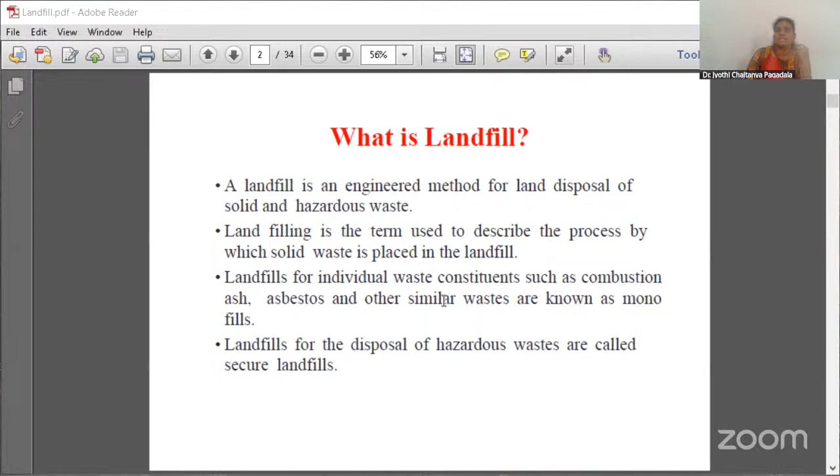Usually, the term landfill is an engineered method for land disposal of solid and hazardous waste, describing the process by which solid waste is placed in the landfill. Here you can see the presence of landfills.

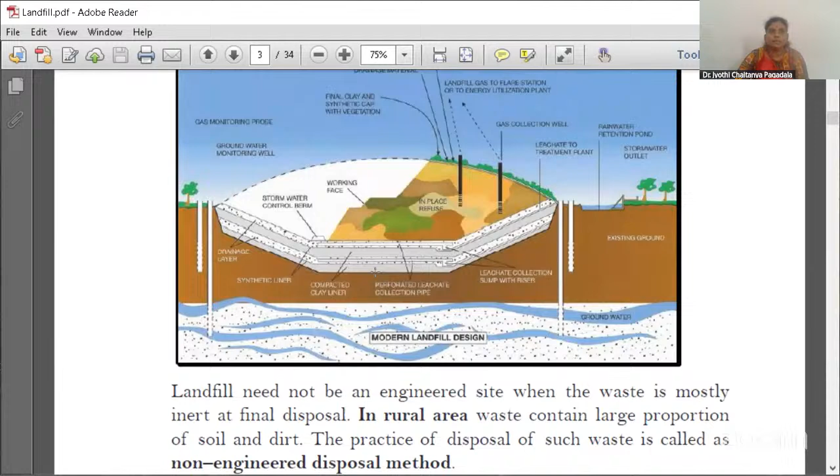Here it is a modern landfill design, and this design explains that a landfill need not be an engineered site when the waste is mostly inert at final disposal. In rural areas, waste contains a large proportion of soil and dirt.

The practice of disposal of such waste is called a non-engineered disposal method. Here we can consider this a modern landfill. In the upper layer, we have the presence of clay and synthetic cap with vegetation, granular drainage material, moisture barrier layer, and landfill gas going to a flare station or to energy utilization plants.

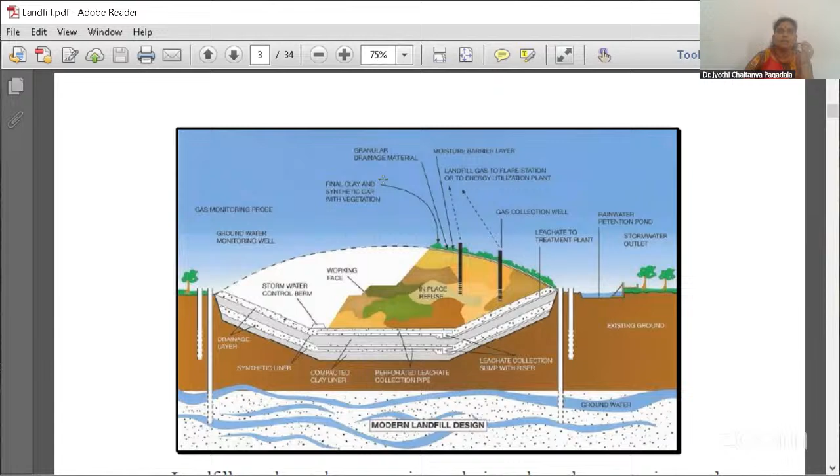What is the basic principle of this landfilling purpose? The purpose of landfilling is to bury or alter the chemical composition of the waste so that it does not pose any threat to the environment or public health.

Landfills are usually made up of cells in which a discrete volume of waste is kept isolated from adjacent waste cells by a suitable barrier. A cell is used to describe the volume of material placed in a landfill during an operating period.

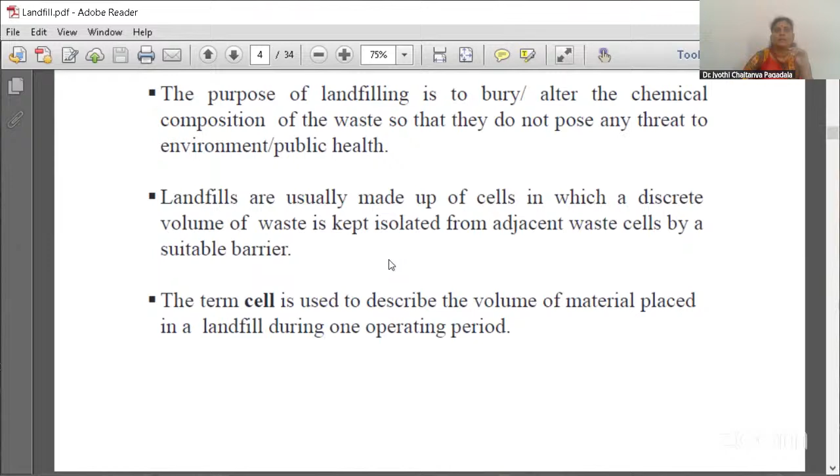The daily cover ensures no landfill refuse is left exposed overnight. If we find any bare land beside our home, it's usually human tendency to throw household waste in that land, so eventually that land becomes like a landfill design.

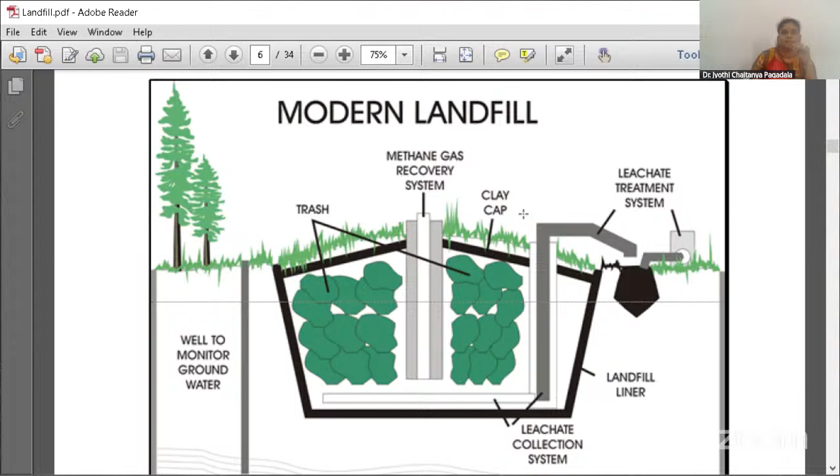When coming to the modern landfill design, here you can see the modern landfill: a well to monitor groundwater, the aquifer, a trash and methane gas recovery system, a clay cap, and a leachate collection system. The landfill liner and leachate treatment system. Once combustion happens, the waste material or methane gas is recovered from that system and collected.

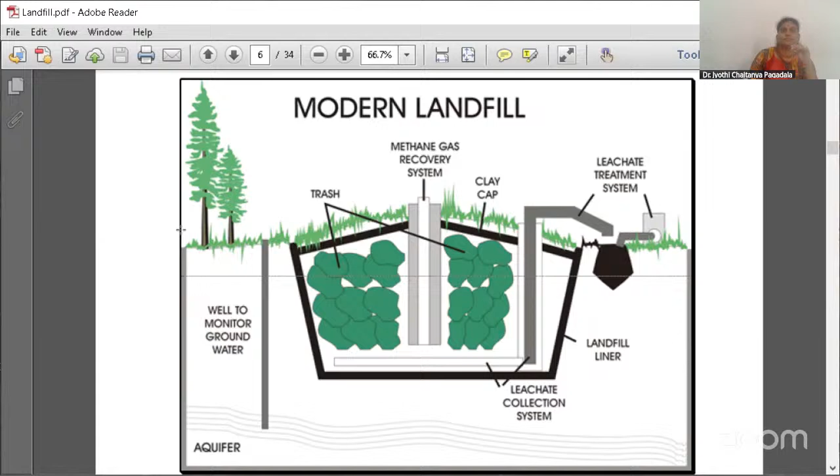What are the basic characteristics of landfills? The solid waste is placed in a suitably selected and prepared landfill site in a carefully prescribed manner. The waste material is spread out and compacted with appropriate heavy machinery, and covered each day with a layer of compact soil.

The most important feature of a modern sanitary landfill design is the technology used to prevent groundwater pollution. It relies on containment rather than treatment.

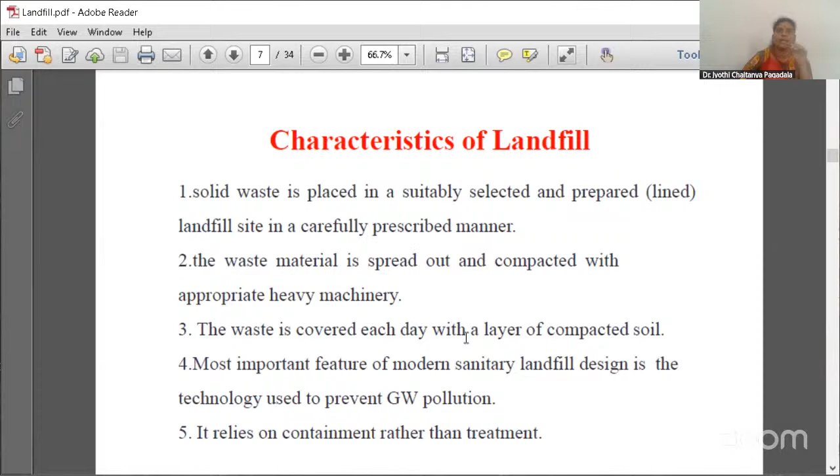What are the basic requirements for a landfill? We have four minimum requirements: full or partial hydrological isolation, formal engineering preparation, permanent control, and planned waste placement and covering.

For fulfilling all these requirements, the important aspects of landfilling processes are the feasibility of land disposal of solid waste depending on factors like type of solid waste, quantity of waste, characteristics of waste, and laws and regulations, soil and site characteristics, total capacity and design life of a new landfill depending on the size, topography of the site, and rate of refuse generation.

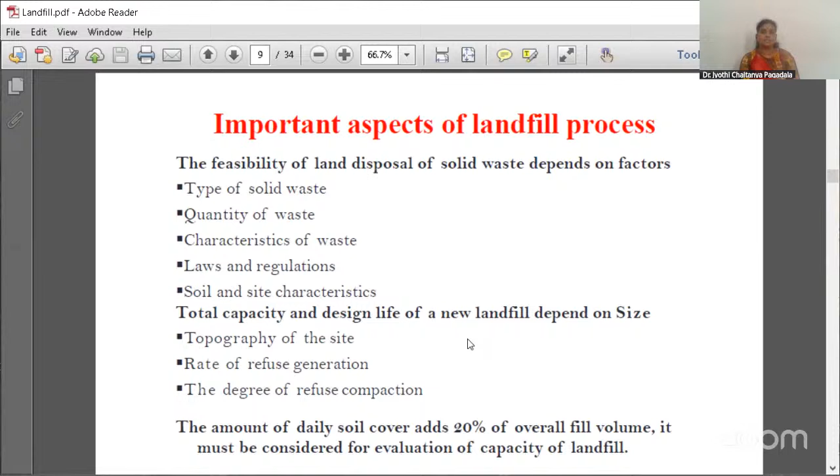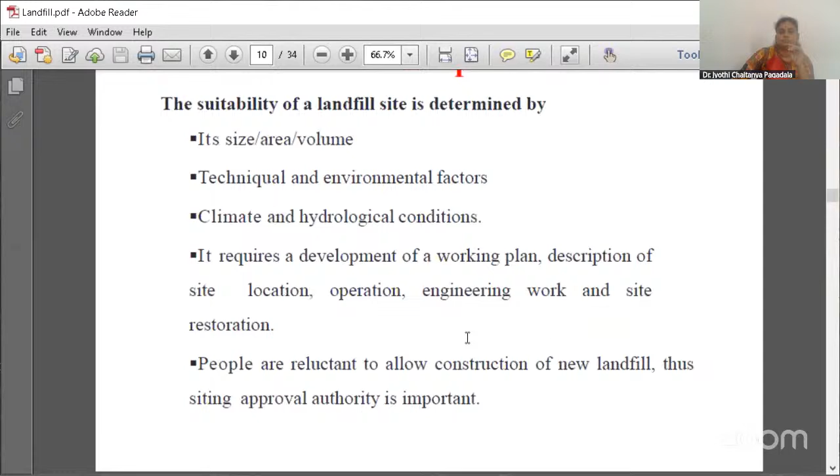The degree of refuse compaction and the amount of daily soil cover, which adds 20% of the overall fill volume, must be considered for evaluation of capacity of a landfill.

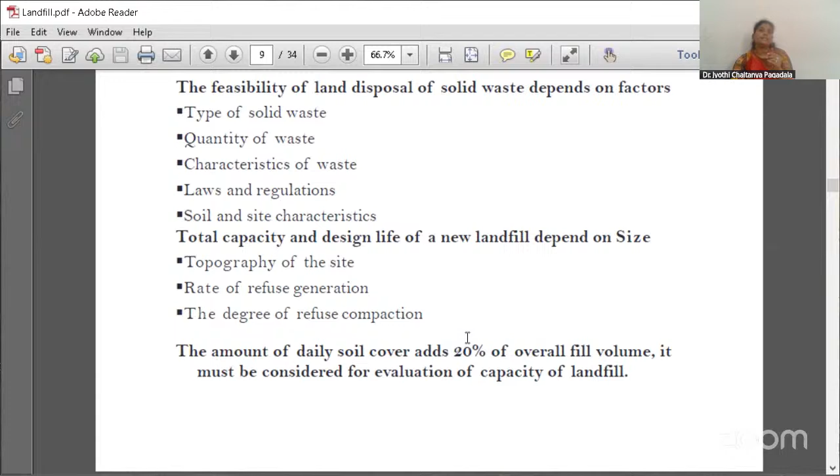For maintaining all this, first we have to select the site. For the site selection process, what do we need? The suitability of a landfill site is determined by its size, area, volume, technical and environmental factors, climate and hydrological conditions. It requires the development of a work plan, description of site, location, operation, engineering work and site restoration.

Usually, people are reluctant to allow the construction of a new landfill. Thus, a siting approval authority is more important. Sometimes, around the landfill, we can see the releasing of harsh gases also takes place. For this, the motto of landfilling is the protection of groundwater. So the site selection process, the components, and the cell selection in the landfill, everything is more important.

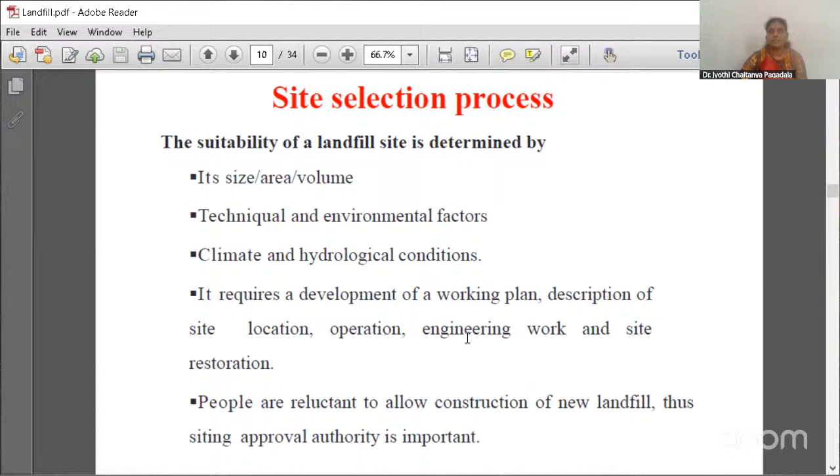Yesterday we discussed the sewage wastewater. So here, after the site selection process, first we have to check the components of the landfill. What are the components of the landfill? An environmentally sound landfill comprises appropriate liners for protection of groundwater, runoff controls, a leachate collection and treatment system, monitoring wells, and an appropriate final cover design.

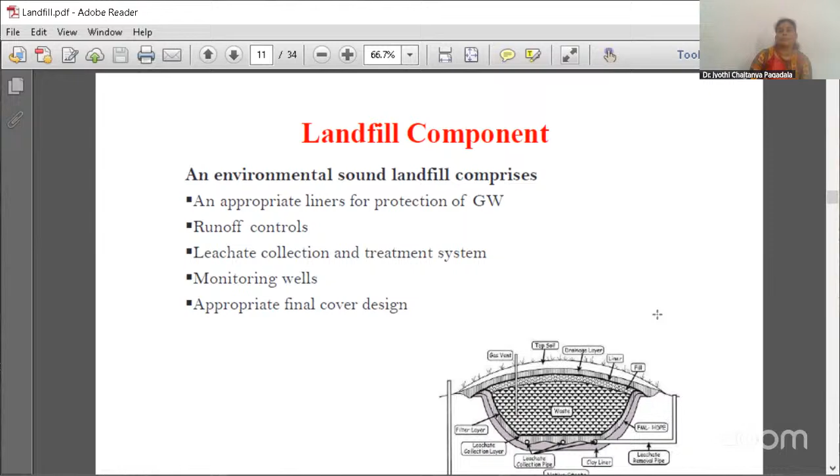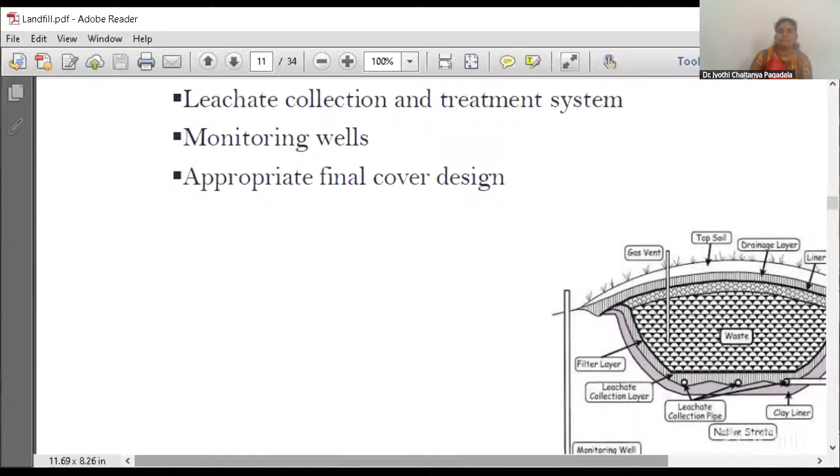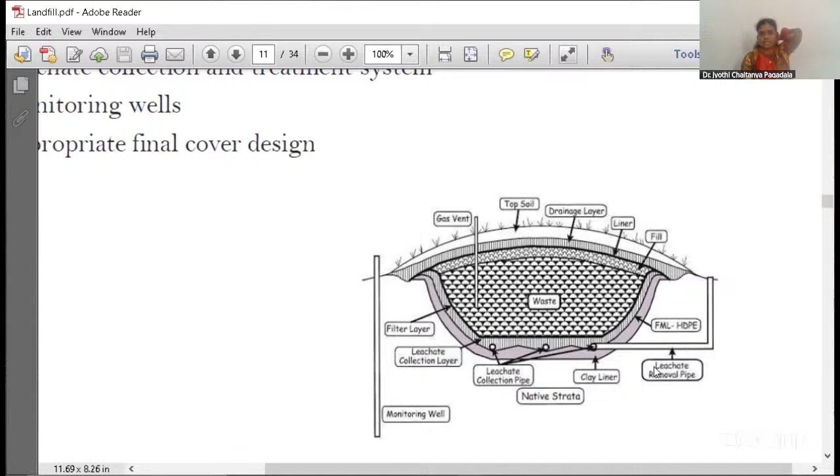So here you can see the design of the landfill. Already we have seen that the landfill should not disturb the groundwater. Our motto is the protection of groundwater. So the filter layer, the leachate collection layer and the leachate collection pipe. Here you can see the presence of waste, and the clay liner also will be there. And here we can monitor the well, that pit or the cell.

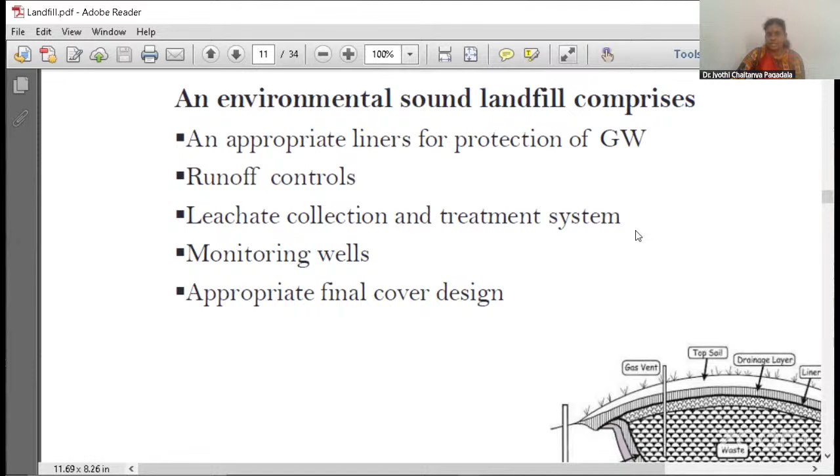So here we can see the topsoil, drainage layer, liner, and fill. This is all about landfill components. So what are they? Runoff controls, leachate collection and treatment system, and monitor wells. Here you can see the monitor wells and appropriate final cover design.

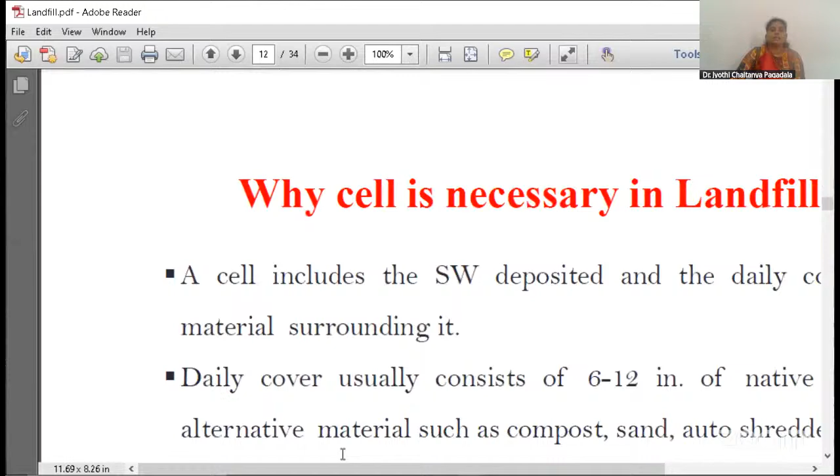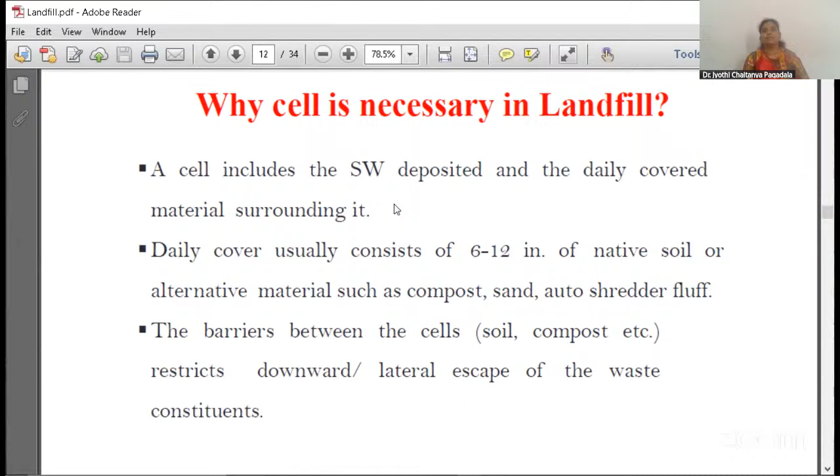Coming to why the cell is necessary in a landfill. The cell includes the waste deposited and the daily cover material surrounding it. The daily cover usually consists of 6 to 12 inches of native soil or alternative material such as compost, sand, or auto shredder fluff. And the barriers between the cells, like soil and compost, restrict the downward or lateral escape of the waste constituents.

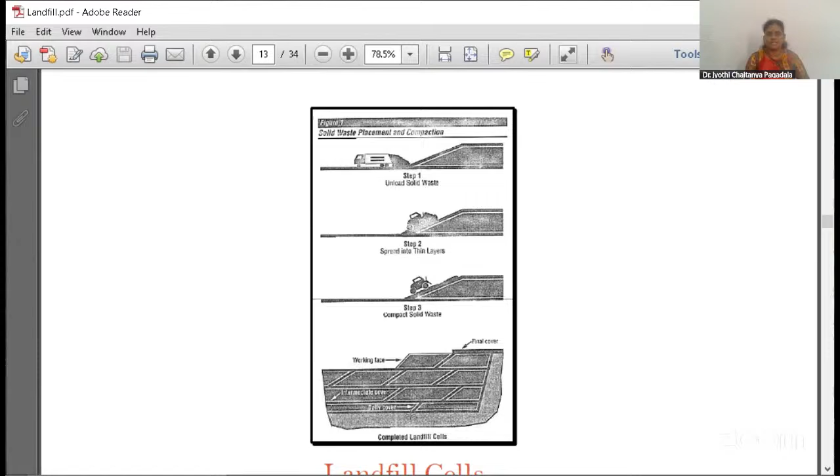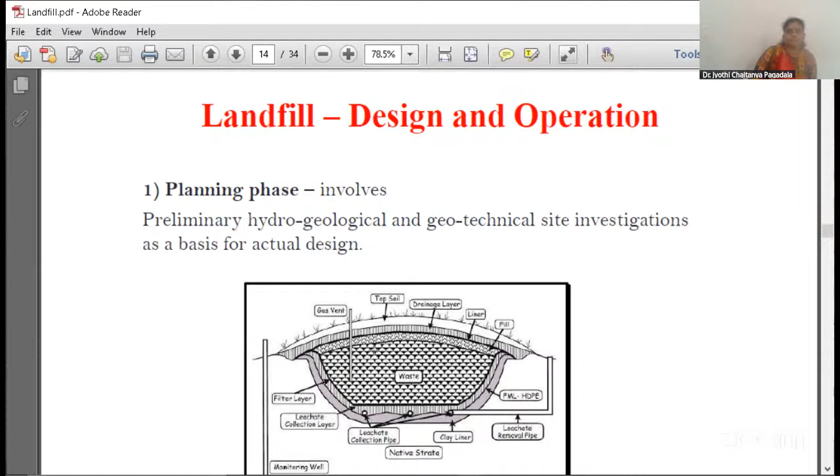These are the landfill cells. Here, solid waste placement and compaction: unloading of the solid waste, spreading into thin layers, compacting the solid waste, and the completed landfill cells. Every cell is considered like a landfill. And landfill design and operation. Here, the planning phase involves a preliminary hydrogeological and geotechnical site investigation as the basis for actual design.

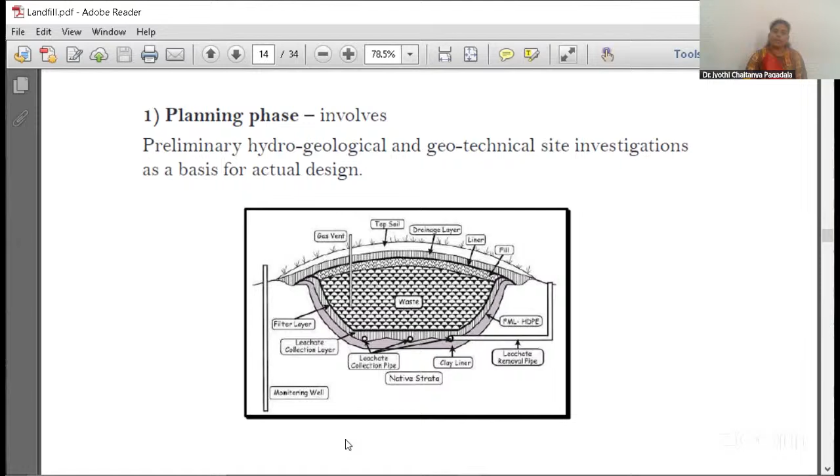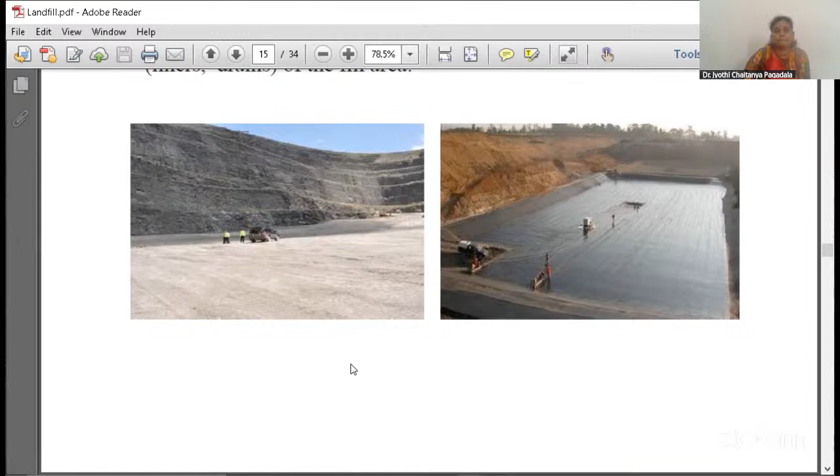The second one is the construction phase. Here you can see clearly the earthwork, road and facility construction and preparation, liners, and drains of the fill area. The next one is the operation phase, which takes 5 to 20 years. It involves work at the front of the fill area, the operation of environmental installations and completion of finished sections, and has a high traffic intensity.

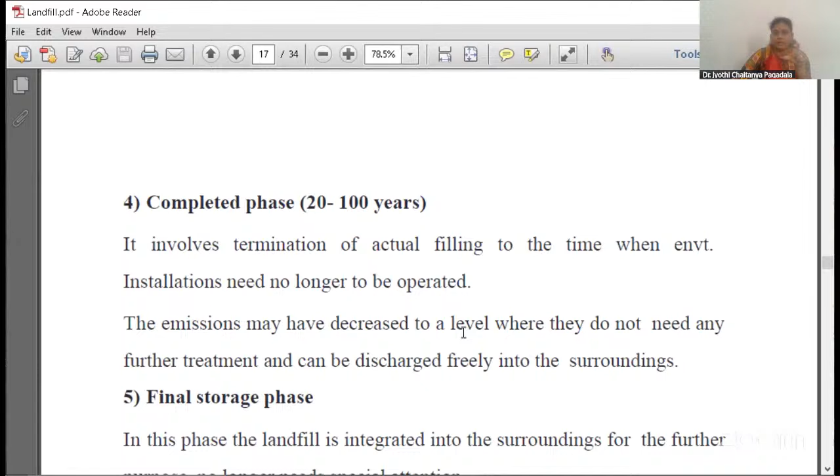The completed phase, 20 to 100 years, involves the termination of actual filling up to the time when the environmental installations no longer need to be operated. The emissions may be decreased to a level where they do not need any further treatment and can be discharged freely into the surroundings. Final storage phase: in this phase, the landfill is integrated into the surroundings for further purposes. No special attention is needed any longer.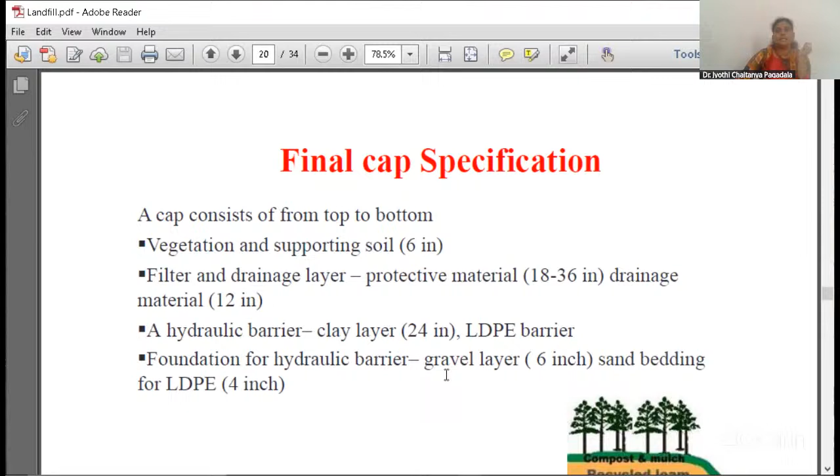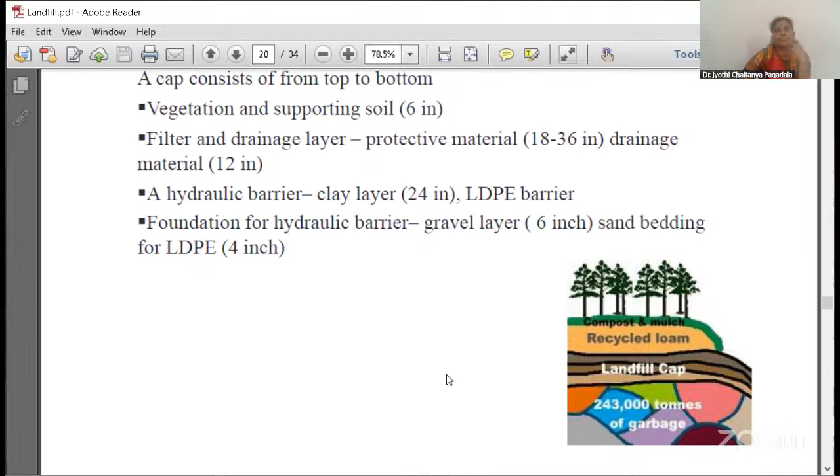And final cap specifications. A cap consisting of, from top to bottom, vegetation and supporting soil is 6 inches. Filter and drainage layer, a protective material 18 to 36 inches, and the drainage material is of 12 inches, a hydraulic barrier, clay 24 inches, and LDPE that is of 4 inches, and gravel layer with 6 inches. Sand bed, the sand for the sand bedding, LDPE is 4 inches.

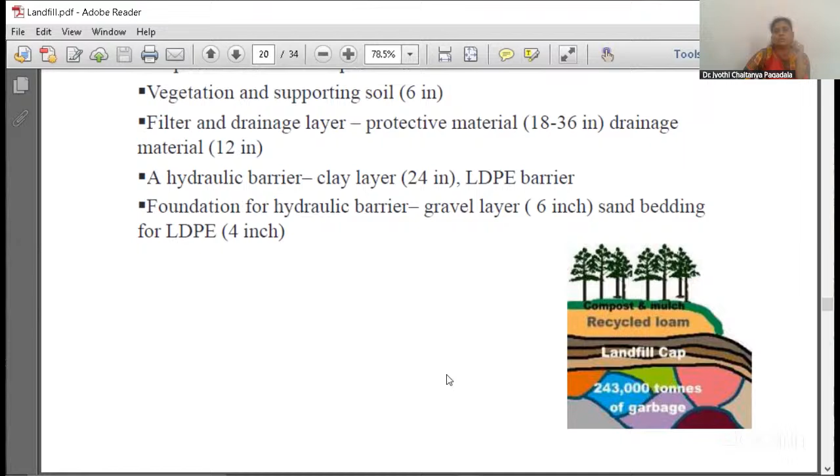What are the specifications for landfilling operation? A waste subject to landfilling shall be compacted in thin layers by compactors to achieve high density of the waste. Prior to the commencement of monsoon season, an immediate cover of 40 to 65 centimeters thick of soil shall be placed on the landfill with proper compaction and grading to prevent infiltration. A proper drainage shall be constructed to divert the runoff away from the active cell of the landfill.

When the total depth of the landfill exceeds 9 meters, that is 30 feet from the base, an intermediate cover is to be used at medium depth. It is typically 2 feet of clay soil and 6 inches of topsoil over the area. And the new phases are started on the top of the lower phase.

And landfilling, a settling process. This landfilling settling process consists of 3 stages. One is primary consolidation, the other one is secondary compression, and the third one is decomposition. When coming to the primary consolidation, a substantial amount of settling occurs at this stage. It is caused by weight of waste layers and the truck movements and bulldozers and mechanical compactors. After this stage, aerobic degradation of the waste products may occur.

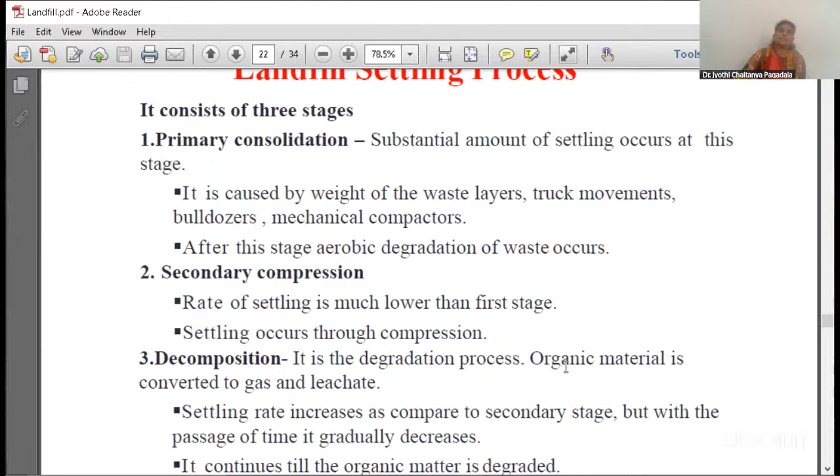The other one is the microbial degradation process. The microbial degradation process is a biological process, the most important aspect of landfilling, which determines the quantity and quality of leachate and gas. After the disposal, a large part of waste becomes anaerobic due to the absence of oxygen. Microbial activity degrades the solid organic carbon and produces methane and carbon dioxide.

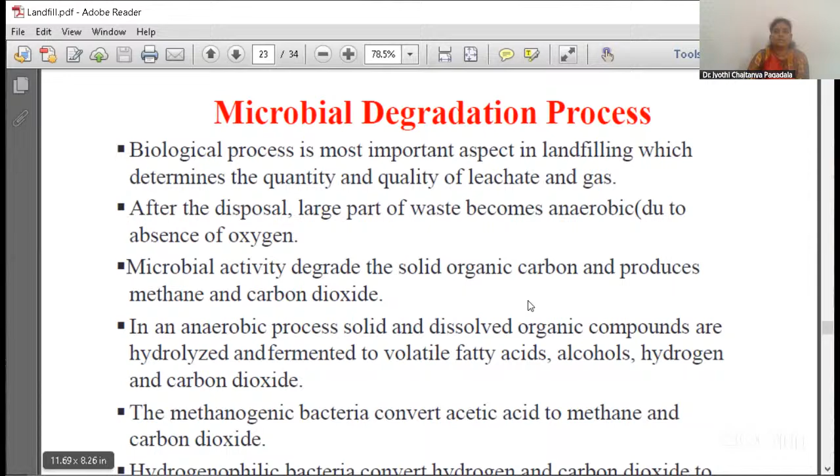In an anaerobic process, solid and dissolved organic compounds are hydrolyzed and fermented to volatile fatty acids, alcohols, hydrogen, and carbon dioxide. The methanogenic bacteria convert the acetic acid to methane and carbon dioxide. And hydrogenophilic bacteria can convert the hydrogen and carbon dioxide to methane. So this is how the microbial degradation process takes place.

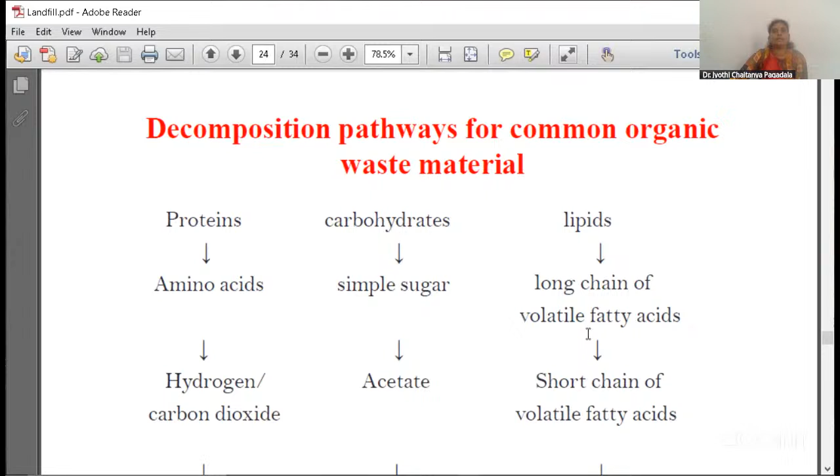Here you can see the pathways for common organic waste materials. If the waste material contains protein, the protein is converted into amino acid, and the amino acid is converted to hydrogen or carbon dioxide and methane. And if the waste material contains carbohydrate, that is converted into simple sugar with the help of microorganisms, and that will in turn be converted into acetate. The final product of this waste material is again methane and carbon dioxide.

If the waste material is a lipid, the lipid is a long chain of volatile fatty acids. That volatile fatty acid becomes a short chain of volatile fatty acids that produces acetate. So here the final decomposition product of the common organic waste material is methane, CO2 and acetate.

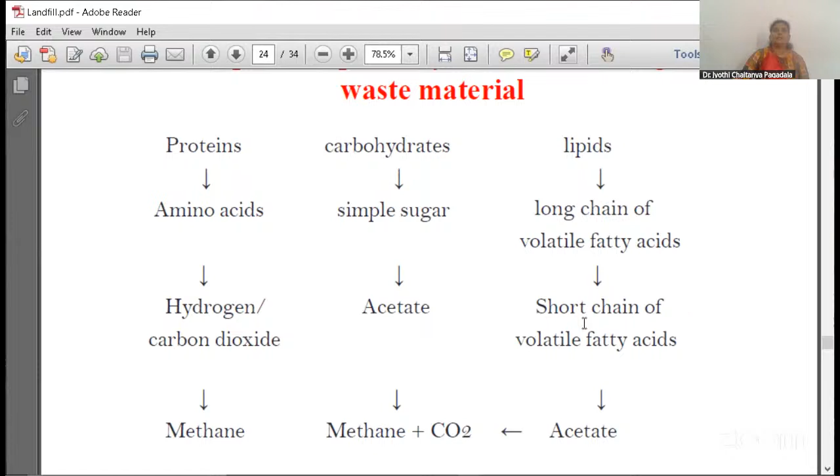Then what are the factors affecting the landfill gas and leachate generation? Here, the nature of waste, moisture content, pH, particle size and density, and temperature. Nature of waste: the amount of gas mostly depends upon the content of biodegradable material in the waste. Moisture content: microorganisms require a minimum of 12% moisture for growth. Thus, it is an important factor in determining the gas production. pH: methanogens grow only at pH around neutrality, like 7. The percentage of gas depends upon the pH.

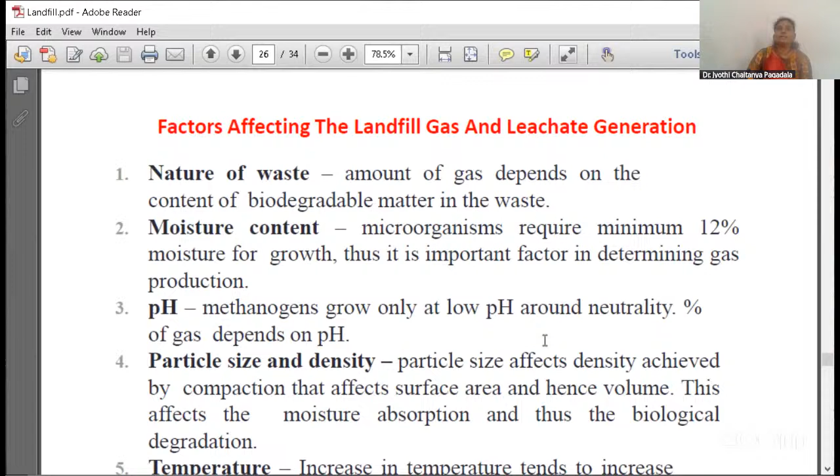What are the methods of landfilling? The principal methods used for landfilling are excavated cell or trench method, ideally suited to areas where an adequate depth of cover material is available at the site and the water table is not near the surface. If we are thinking to construct a landfill, the first and foremost thing we have to see is that the area should be suitable, where an adequate depth of cover material is available at the site and the water table is not near the surface. Wastes are placed in cells or trenches excavated in soil. Soil excavated from the site is used for daily and final cover.

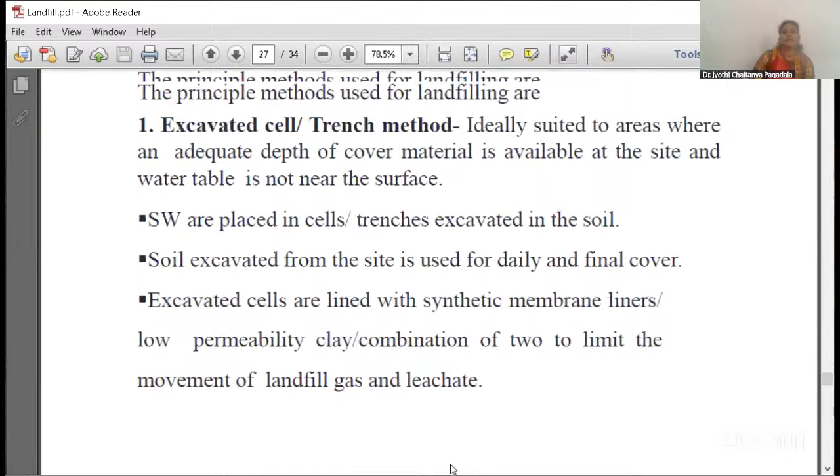Excavated cells are lined with synthetic membrane liners, low permeability clay, or a combination of the two to limit the movement of landfill gas and leachate. This is about the first principle, the excavated cell or trench method.

Coming to the next method, that is the area method. The area method is used when terrain is unsuitable for excavation of cells or trenches and the groundwater table is very high. In this area method, first we have to see the site preparation, which includes installation of liners and a leachate management system.

Cover material must be obtained from adjacent land or borrow pit areas. Since there is limited material for covering, compost and foundry sand have been utilized as intermediate cover material. Temporary cover material of soil and geosynthetic blankets are placed temporarily over the completed cell and removed before the next lift is begun. Leachate generation may occur and may be difficult to control.

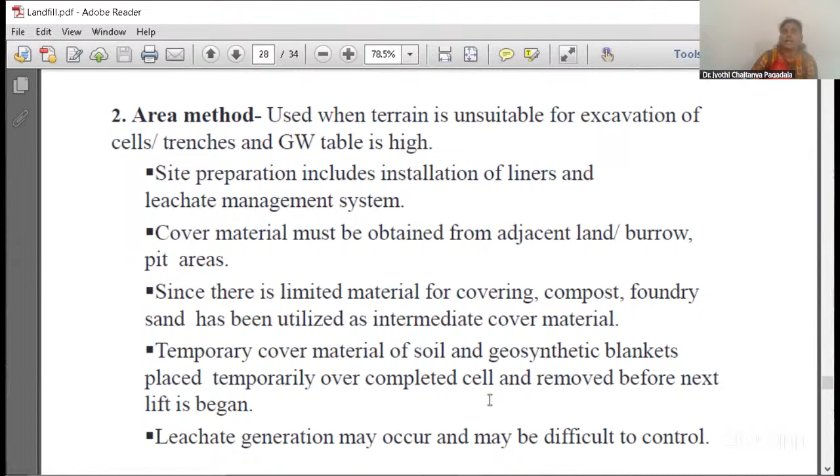The basic difference of the trench method, that is the excavated cell method, is first we have to see the site and that the water table is not near the surface. Then solid waste is placed in cells or trenches excavated in the soil. The soil excavated from the site is used for daily and final cover. The excavated cells are lined with synthetic membrane liners, low permeability clay, or a combination of the two to limit the movement

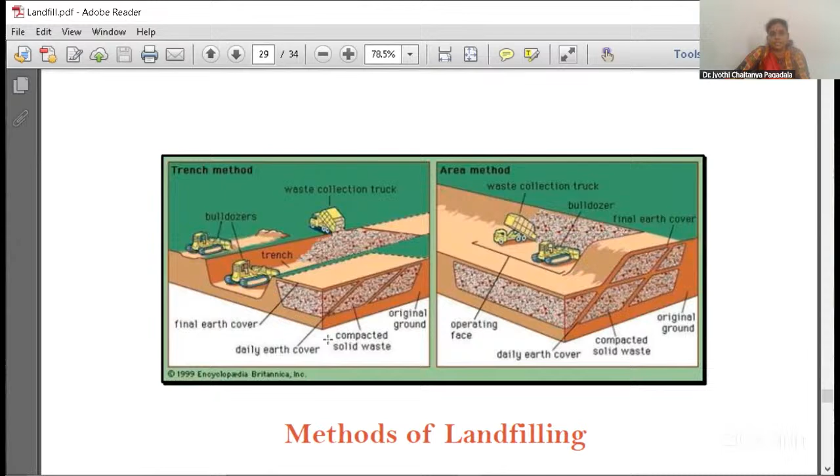The third method is the canyon or depression method. What is the canyon and depression method? This method involves placement and compaction of solid waste in a canyon or depression. It differs with the geometry of the site, characteristics of available cover material, and the hydrology and geology of the site. Control of surface drainage is often a critical factor in this method. Here the filling starts at the head of the canyon and ends at the mouth to prevent accumulation of water behind the landfill.

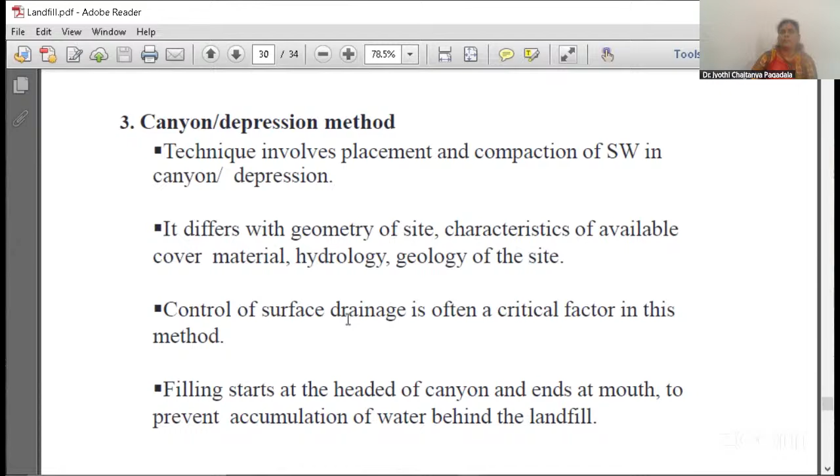Here we have some advantages of landfilling. In addition to providing an option for waste management, it also serves to improve or reclaim poor quality land. It raises the ground elevation or surface grade of the site. Completed landfills have been converted to municipal parks, playgrounds, golf courses, and community land use projects. It is the most economical alternative for solid waste disposal, which accounts for its frequent application.

Other disposal methods are not entirely safe and efficient throughout the year. Incineration is a costly process, and the residue requires ultimate disposal on land. Composting is a seasonal option. It is not possible to reclaim and recycle all solid waste material. Thus, landfilling is the most convenient option.

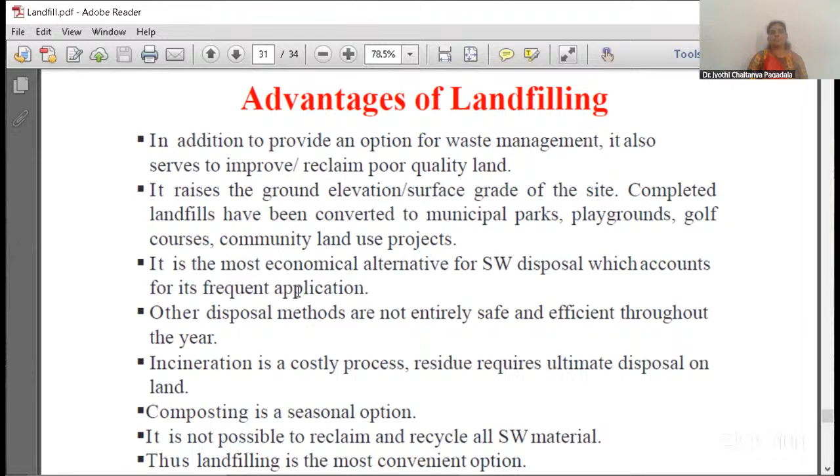Coming to the disadvantages, the foremost disadvantage is damage to the local ecosystem. It seriously damages the local system, and it is difficult to find a suitable site within an economically feasible distance. It is not possible to build a completely safe and secure solid waste landfill. Some of the pollutants may escape into the environment in the form of leachate. The potential harm to public health is due to air, soil, water, and noise pollution. Damage to the local ecosystem leads to public opposition.

So here we have to consider public and environmental health concerns before we start any landfill. It is very important to minimize contamination from landfills to the surrounding environment. Hydrology, groundwater flow, geology, rock type and soil permeability of the site have a direct influence on the possibility of water pollution, that is, groundwater pollution. The landfill should not be located in low-lying wetland areas, near marshes or swamps, as the waste should not come in contact with surface water or groundwater.

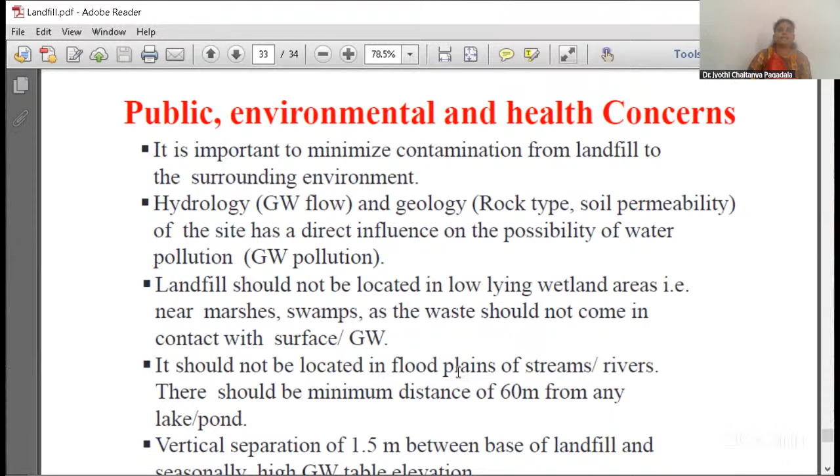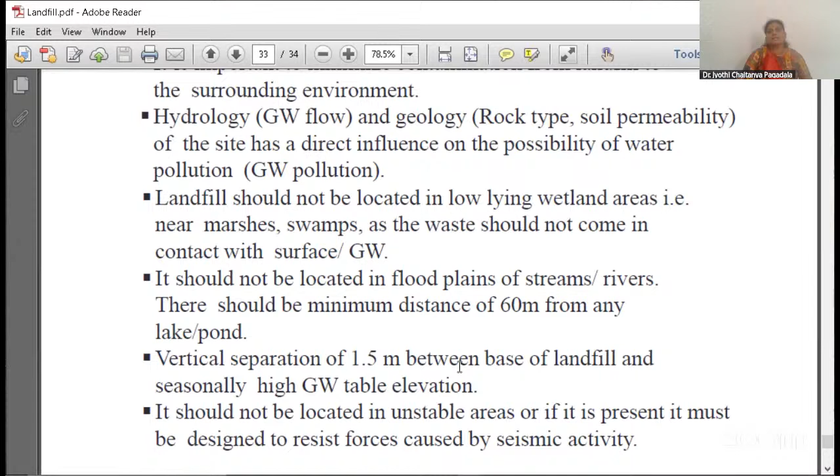It should not be located in floodplains of streams or rivers, and there should be a minimum distance of 60 meters from any lake or pond, and a vertical separation of 1.5 meters between the base of the landfill and the seasonally high groundwater table elevation. It should not be located in unstable areas, or if it is, it must be designed to resist forces caused by seismic activity. This is about landfilling.

waste. And landfilling is a term which is used to describe the process by which solid waste is placed in the landfill. And landfills for the individual waste constituents such as combustion ash and asbestos and other similar wastes are known as monofills, and the landfills for the disposal of hazardous waste, mainly for hazardous waste, are called secured landfills. This is about landfills.

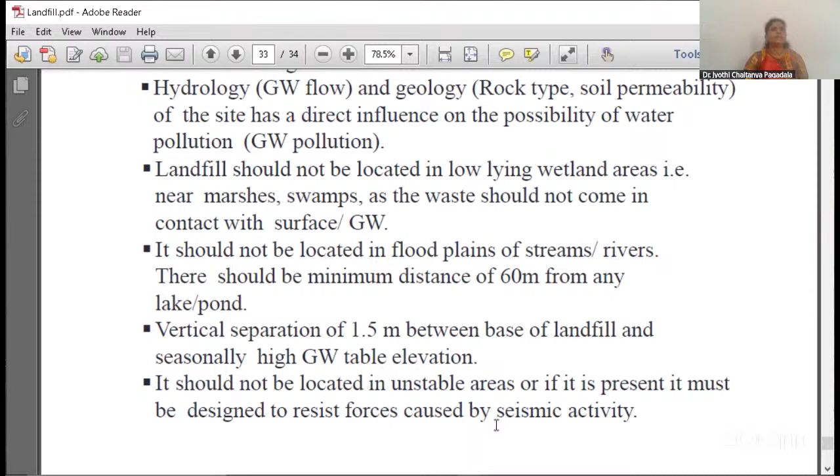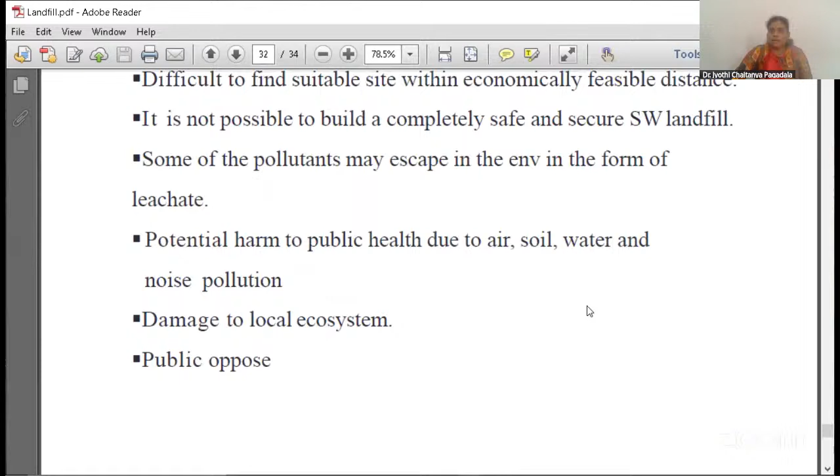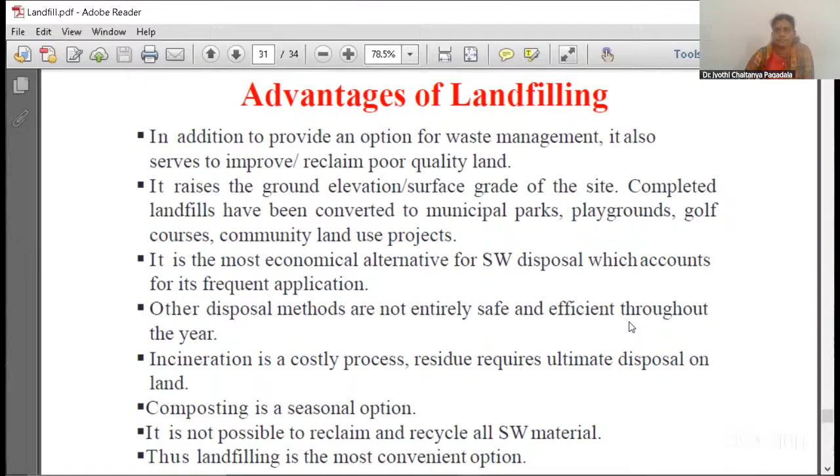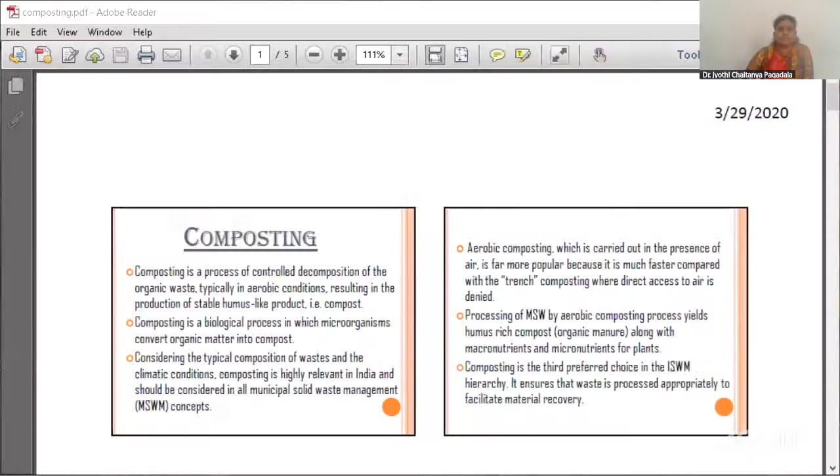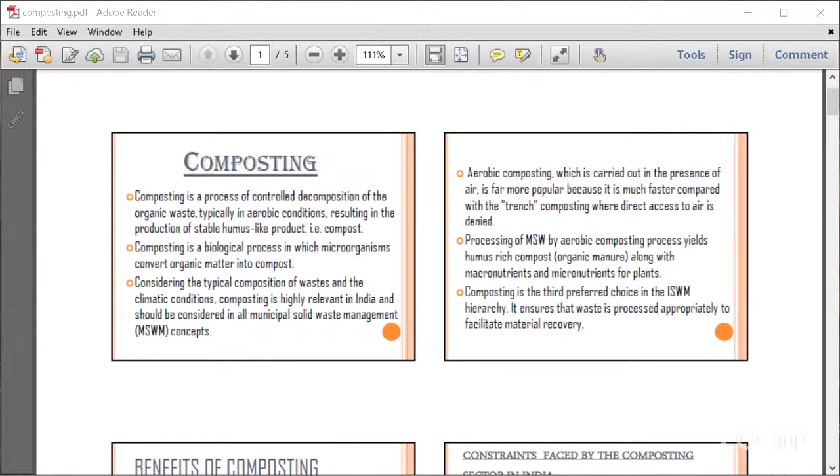our next topic is composting. Composting. Okay. So our next topic is composting. The name itself is indicating the composting. It is a process of controlled decomposition.

Before going to describe the composting, even yesterday or today, we discussed the municipal solid waste. The organic content of the municipal solid waste tends to decompose, leading to various smell and odor problems. So, it also leads to the pollution of the environment. To ensure a safe disposal of the municipal solid waste, it is desirable to reduce its pollution potential, and several processing methods are proposed for this purpose.

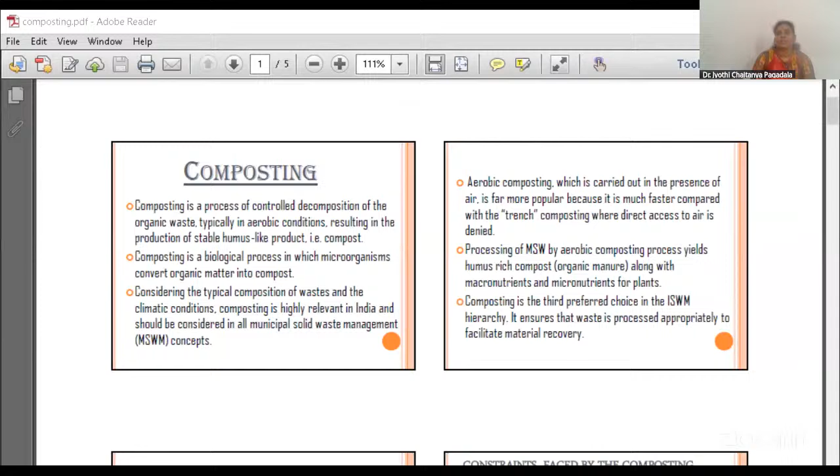The first thing is composting. Composting is quite commonly used and results in production of a stable product, a compost, which depending upon its quality can be used as a low grade manure and soil conditioner. The process involves the conversion of natural resources, and it is an important processing method, especially in agriculture and horticulture areas.

In the case of individual households, small establishments and colonies, vermicomposting, which involves the stabilization of the organic solid waste through earthworm consumption for conversion of the organic material to worm casting. We will discuss this casting in our next discussion. This worm casting is being increasingly preferred.

So, here, what are the principles of composting, manual and mechanized methods? So, the composting, decomposition, and stabilization of organic waste material is a natural phenomenon. Composting is an organized method of producing compost manure by adopting this natural phenomenon.

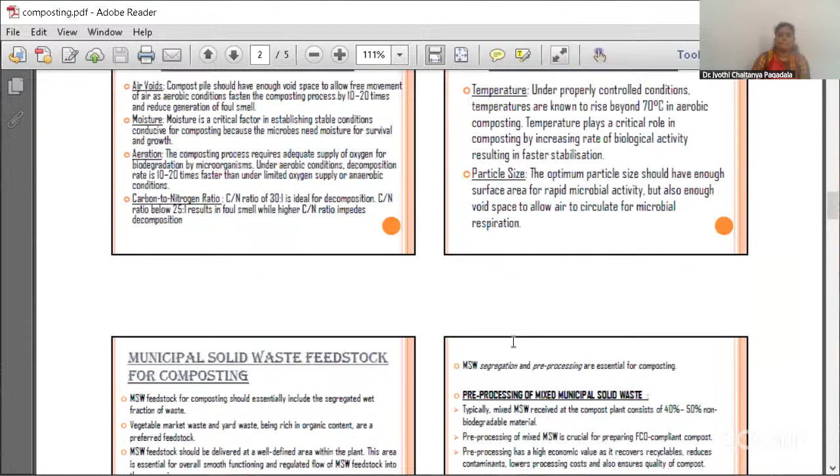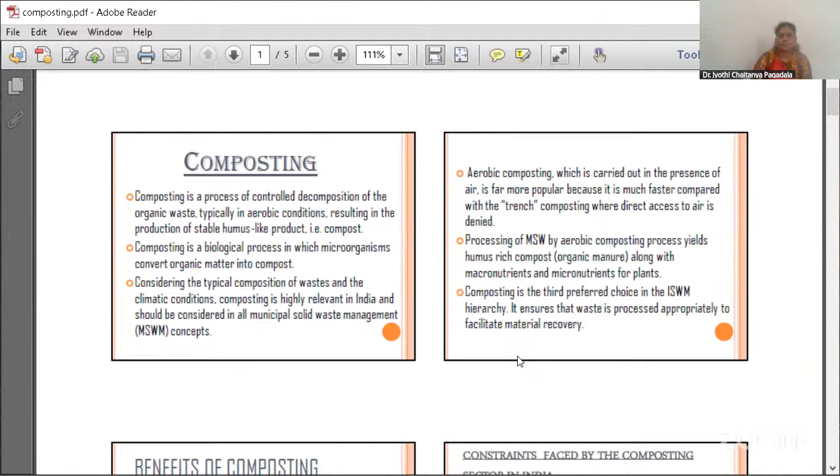Here, what are the basic benefits of composting? Like benefits of composting or the real economic benefits of composting, that includes soil quality, enhanced water retention capacity of soil, increased biological activity, micronutrient content, and improved pest resistance of the crops.

And composting minimizes and avoids GHG emissions from anaerobic decomposition of organic waste such as in large unturned heaps. Composting increases the design life of the waste management facilities. The stringent design requirements and associated cost for catering to the management of the leachate from organic waste decomposition may be reduced in those landfills that do not receive organic waste.

The use of compost reduces the dependence on chemical fertilizers for agricultural operations. What are the constraints faced by the composting sector in India? Actually, we have different methods of composting. One is the Indore method and another one is the Bangalore method. The manual decomposition was systemized by the scientist Howard and his co-workers. It was further developed by Acharya and Subramanian, and the methods are conventionally referred to as Indore and Bangalore methods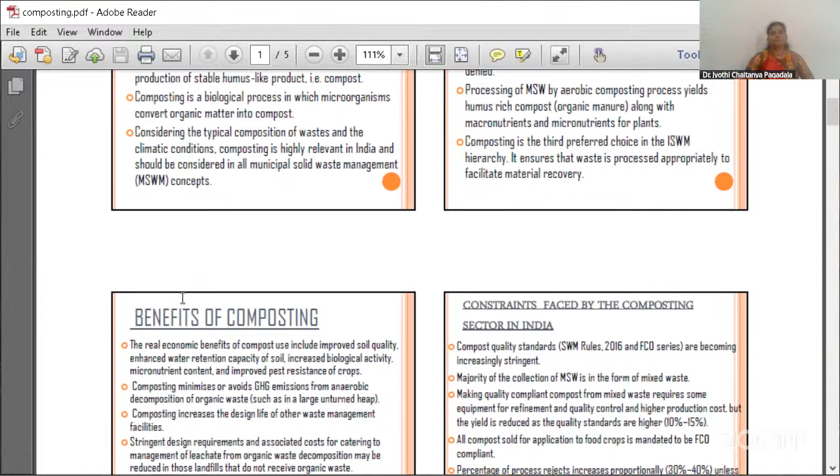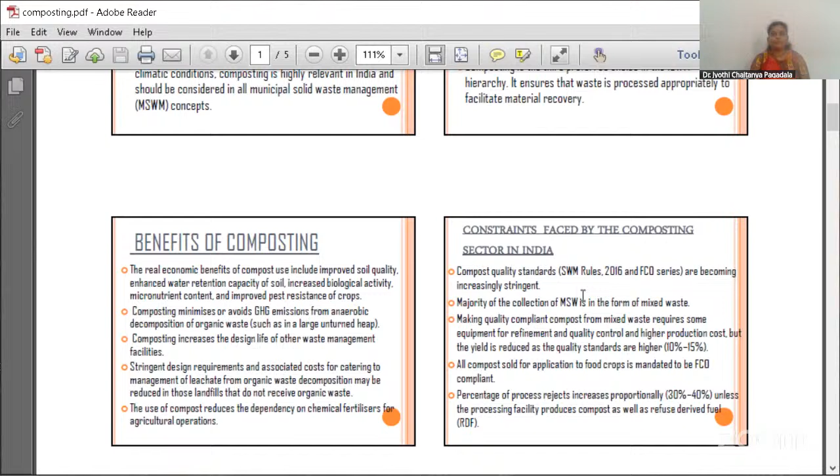The screened compost is stored for about 30 days in heaps about 2 meters wide, 1.5 meters high and up to 20 meters long to ensure stabilization before sale. And the constraints faced by the composting sector in India: compost quality standards are becoming increasingly stringent. The majority of collected municipal solid waste is in the form of mixed waste. Making quality compliant compost from mixed waste requires equipment for refinement and quality control and high production cost, but the yield is reduced, as per the quality standards, to 10 to 15%.

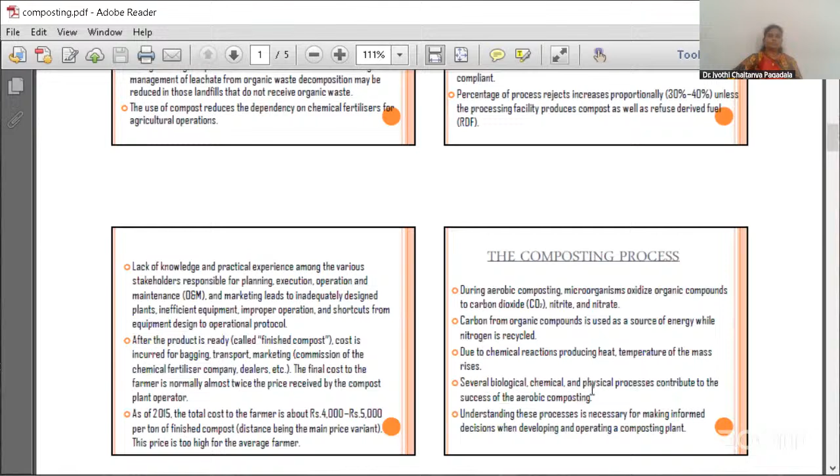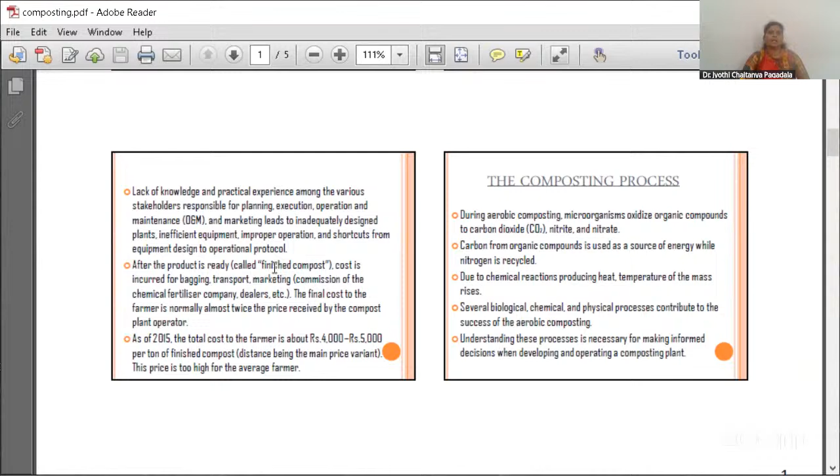All compost sold for application to crops is mandated to be FCO compliant. The percentage of process rejects increases proportionally unless the processing facility produces compost as well as refuse derived fuel. A lack of knowledge and practical experience among the various stakeholders responsible for the planning, execution, operation, maintenance and marketing leads to inadequately designed plants, inefficient equipment, improper operation, and shortcuts from the equipment

design to operation protocol. After the finished compost is ready, costs are incurred for bagging, transport, marketing, and commission of the chemical fertilizer company with the dealers, etc. The final cost to the farmer is normally almost twice the price received by the compost plant operator. As of now, in 2015, the total cost to the farmer is about 4,000 to 5,000 per ton of finished compost, distance being the main price variant. This price is too high for the average farmer.

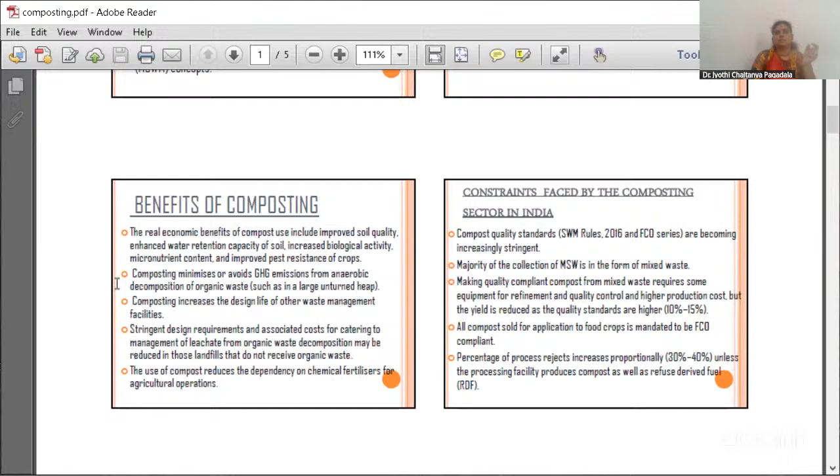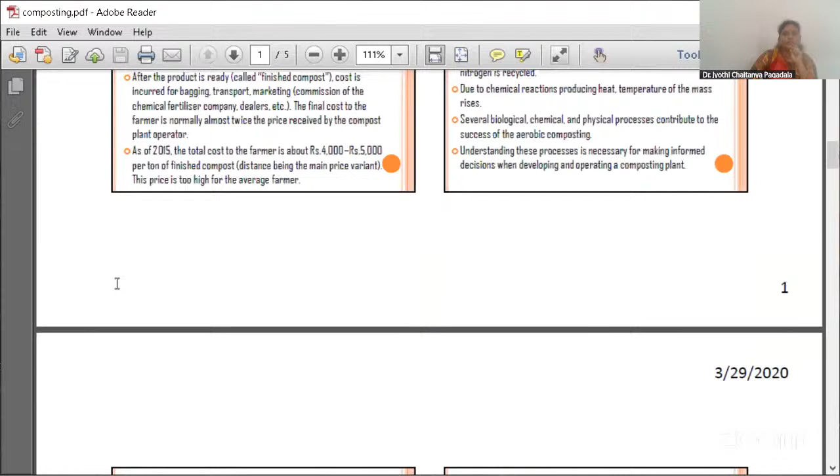These are the limitations and constraints faced by the composting sector in India. Along with this, we have the factors affecting the composting process: organisms and the use of cultures, moisture, temperature, and carbon nitrogen ratio, and mainly the destruction of common parasites and pathogens that takes place at the end of composting, along with aeration and addition of sewage and sewage sludge.

So the first limiting factor here is organisms. Aerobic composting is a dynamic process where bacteria, actinomycetes, fungi, and other biological forms are actively involved.

And the use of cultures: during the development of the composting process, various innovators came forward with inoculum enzymes claimed to hasten the composting process. Investigations carried out by various workers have shown that they are not necessary.

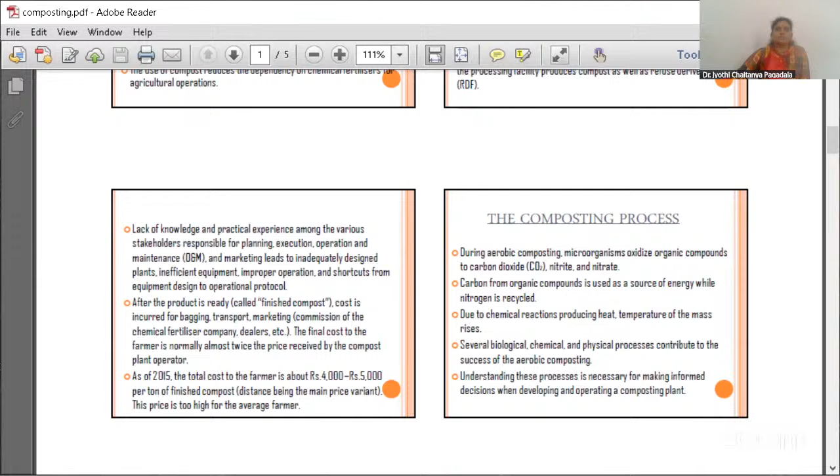So with this, I want to discuss the properties of compost. Here we discussed the biological process and the chemical parameters and physical parameters like temperature, particle size, and everything. Now the other thing is the properties of compost.

The compost prepared from municipal solid waste should be black or brown, almost black in color. It should be crumbly in nature with an earthy odor. The pH should be slightly acidic or alkaline, within the range of 6.5 to 7.5, which can be tolerated. The compost should neither be completely dry nor lumpy.

And water should not come out of the mass when squeezed. The nitrogen, phosphorus and potassium contents should be more than 1% each, and the carbon nitrogen ratio should be 15 to 20.

In order to ensure safe application of compost, the standards laid down in the draft of the Municipal Solid Waste Management and Handling Rules, 1999, notified on 27th September 1999 by the Ministry of Environment and Forest, Government of India, for the production of compost are as follows: arsenic 20 - meaning maximum acceptable concentration in parts per million (ppm) - cadmium 20, chromium 300, copper 500, lead 500, mercury 10, nickel 100, and zinc 2500.

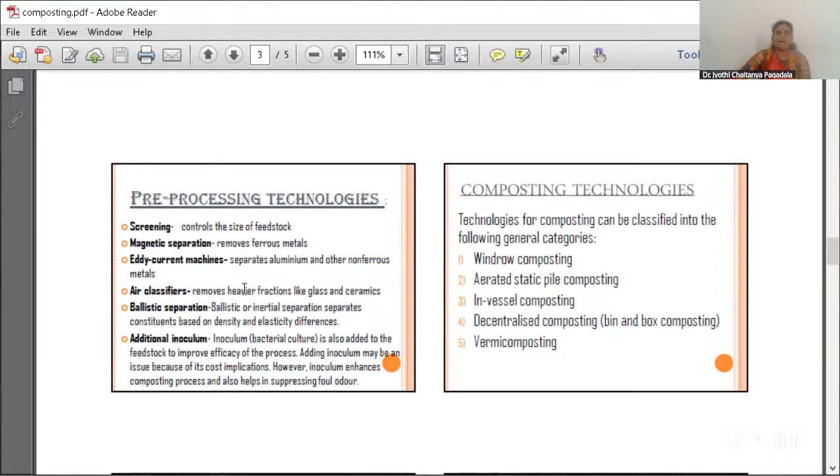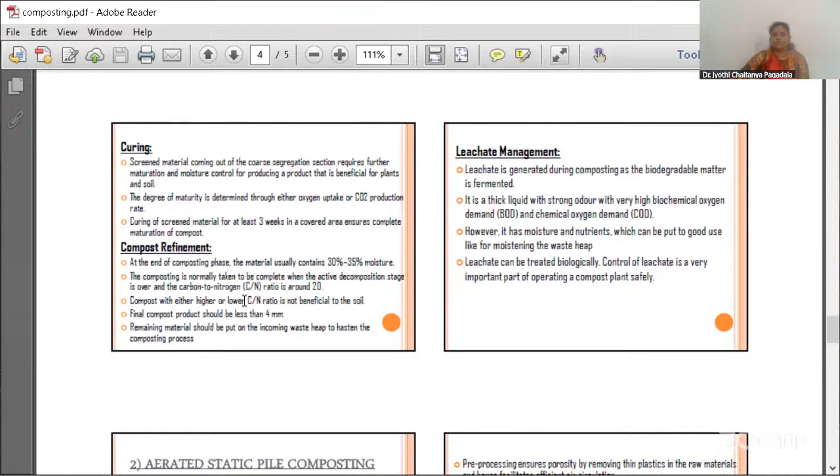For composting plants for Indian municipal solid waste, first we have to assess and develop the market. Selection of sites is more important, and leachate management is also important. After site selection, we have to conduct pilot studies, prepare flow charts, and look at environmental control.

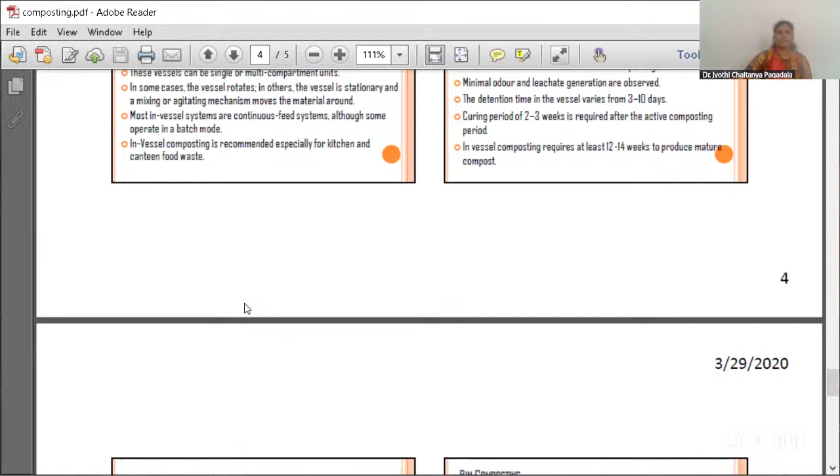We have to check the flow charts for less than 1 lakh population, and also for more than 5 lakh population.

And with this, I'm going to move to vermicomposting. Vermicomposting is the next chapter.

Earthworms are hermaphrodites. Each worm has both male and female organs. They are small tube-like organisms who tirelessly work to turn the earth from the lowest strata to the top.

Worms tunnel deeply in the soil and bring subsoil closer to the surface, mixing it with the topsoil. This makes the formation of multitude of linear tunnels, minute in diameter but deeper below the subsurface. These tunnels last long even after the worms are dead, and they facilitate infiltration of water into the subsurface, reduce runoff, and help in harvesting rainwater.

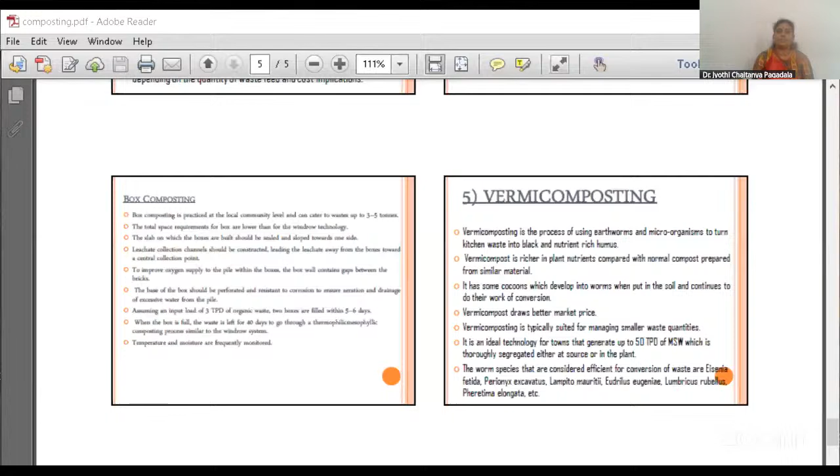Solid waste is one of the environmental challenges facing the world today due to increasing population and urbanization. Composting is a natural process of organic waste treatment, currently practiced with various modifications to the technology. Here we have vermi technology, which is globally becoming a popular solid waste management technique. Vermi technology is a process by which the bioconversion of organic waste into biofertilizers occurs due to earthworm activity.

The earthworms feed on the organic waste and the earthworm's gut acts as a bioreactor whereby vermicast is produced. Organic waste includes animal manure, crop residue, sugarcane trash, vegetable and fruit residue, leaf litter, food waste, and any biodegradable waste—all these we can consider as organic waste.

Types of earthworms used for composting: Anecic earthworms feed on decaying organic matter and are responsible for cycling organic debris into humus. Endogeic worms spend their lives deep in the soil where they feed on decayed matter and mineral soil particles. These worms build burrows.

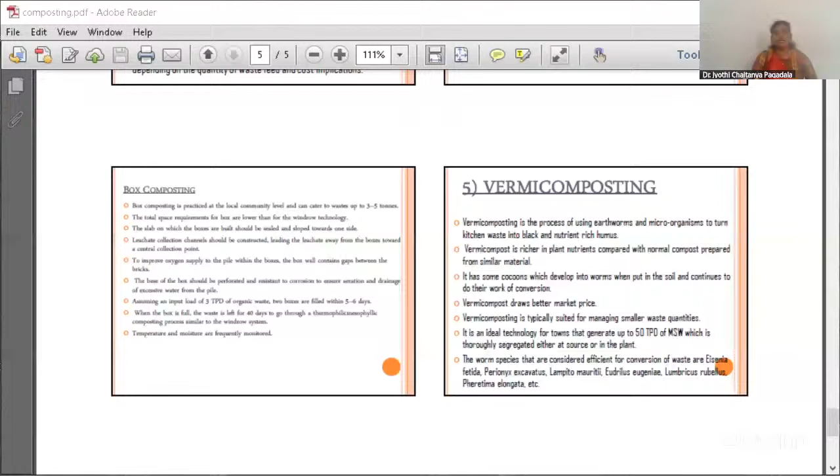Significance of vermicomposting: it is a low cost technology used to treat organic waste. It stimulates plant growth and productivity of soil. It also has positive effects on some aromatic and medicinal plants, and can act as a good soil conditioner. Vermicompost significantly reduces or even replaces the use of dangerous agrochemicals, and it develops the economy and ecology of the nation.